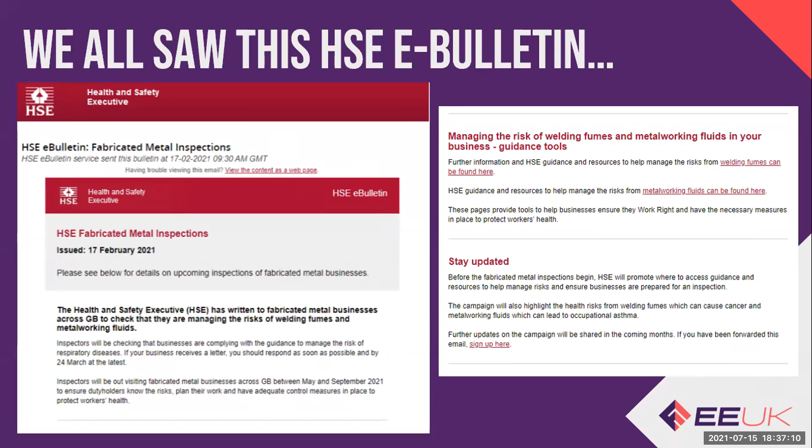Right, so diving right in, the HSE announced earlier this year that they intend to send their inspectors to fabricated metal businesses between May and September of this year. So this is now underway. These inspections are aimed to ensure duty holders know the risks, plan their work, and have adequate control measures in place to protect workers' health. When organizing this presentation, I thought, okay, welding fume and metalworking fluid, these are such big, complex topics. How am I going to break this down?

Well, I'm going to do this how I know how to do this as an occupational hygienist. Occupational hygiene is concerned with the anticipation, recognition, evaluation, and control of health hazards in the workplace. The focus of an occ hygienist is worker health protection.

Did you know, perhaps you probably do know, that for every one safety-related death at work, there are about 100 health-related deaths from work-related disease. It's really shocking, and this is why I focus on occupational health; it is so important.

So I'll be going through each topic, taking the step-by-step approach as an occupational hygienist, and I'm going to start first with metalworking fluid. So, okay, first things first, anticipation. This is the recognition of hazardous conditions. So metalworking fluid, what is it?

It is the name given to a range of oils and other liquids that are used to cool or lubricate metal workpieces when they're being machined, ground, milled. There are 4 basic classes. There's straight or neat cutting oils, which can be made up of mineral or synthetic oils, which have been refined and are not diluted by water.

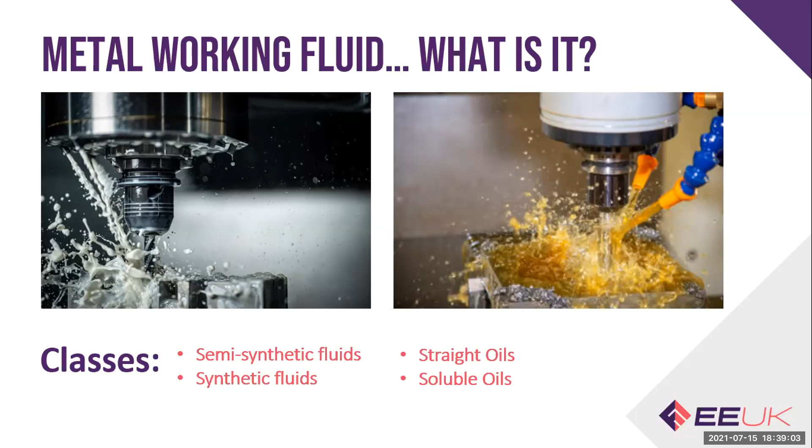There's soluble oils containing refined petroleum oils and emulsifiers. There's semi-synthetic fluids also containing refined petroleum oils to a lesser extent, as well as water and additives. And there's synthetic fluids, which do not contain petroleum oils, but use detergent-like components and other additives to help wet the workpiece. So those are your basic metalworking fluids.

When we go to site, we will see containers of metalworking fluid like this. We could be dealing with a neat mineral oil, a water coolant mixture, a petroleum-based distillate, vegetable oils. It totally depends on what exactly the process is that metalworking fluid needs to do. So what we really need is the safety data sheet, the SDS, to assess what exactly this metalworking fluid is.

But we can't just stop there. The SDS doesn't tell us everything. This fluid can have additives. It can have biocides, contamination of oil or metal fines. These things change the nature of the contaminant. And as this process is a high energy process, it creates a mist. This causes the fluid itself, as well as these contaminants within the fluid, to become airborne.

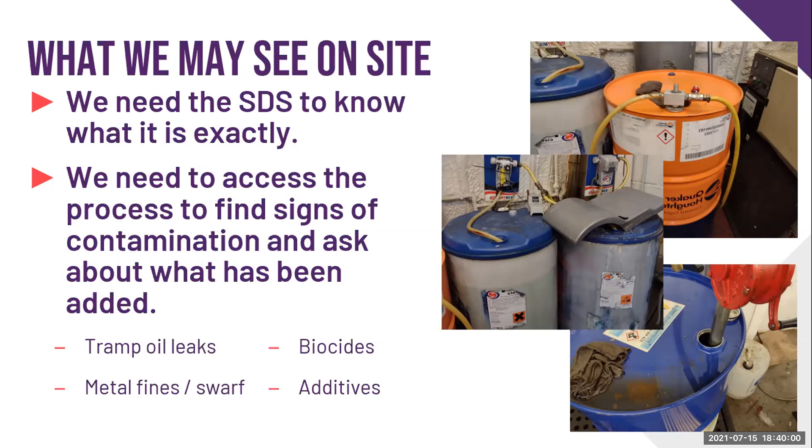Right, so we know what it is now. Next is recognition. This is the identification of hazards and their adverse effects. We've reviewed the SDS. We've looked into contaminants and additives. How hazardous is this fluid when we then generate it into a mist?

Well, the health risks associated with metalworking fluids are thought to be from a microbial origin, so the presence of bacteria and endotoxins. The focus should therefore be on the root of this exposure, which is a poorly implemented fluid management system and inadequate controls.

A poorly managed system will likely lead to increased microbial growth, and inhaling contaminated metalworking fluid mist can cause lung disease, such as hypersensitivity pneumonitis and occupational asthma. It can cause skin disease, such as dermatitis.

But the health risks can be managed should the composition of the fluids be prevented from deteriorating whilst in use. As the fluid contaminates and the conditions are in favor of microbial growth, this increases the health risk.

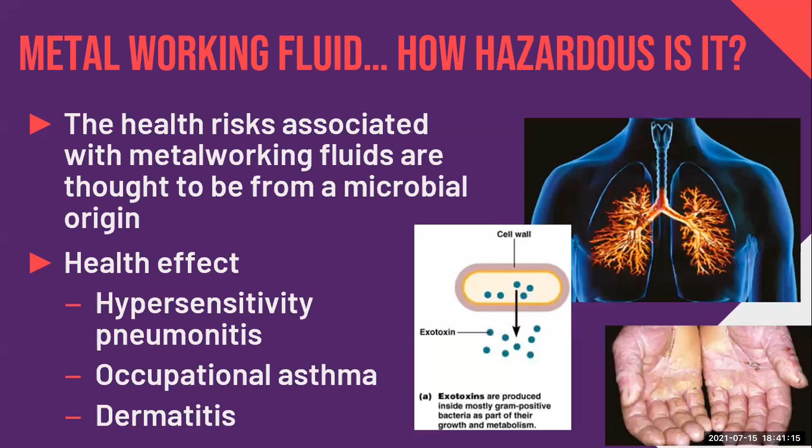Okay, next, evaluation, the measurement of exposure to hazards and the qualitative or quantitative interpretation of those hazards. This is a little bit of a pet topic of mine, so forgive me, I get a little excited here.

But before we actually go straight into personal exposure monitoring via sampling, let's first look at the ACOP of COSHH Reg 10, which is about monitoring. Ask yourself, do you need to monitor? We do if the points seen here on this slide are met. But we should also really be keeping in mind there is an HSE monitoring strategy for toxic substances outlined in a document called HSG 173. It details at what point measurements would in fact be needed.

There's quite a bit you can really do just by an initial appraisal and a basic survey using qualitative or semi-quantitative means of assessing the exposure. So it's just to say you don't necessarily need to dive straight into sampling.

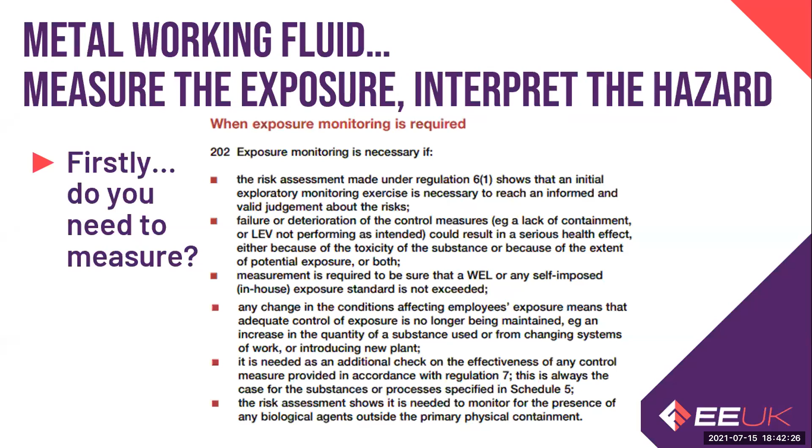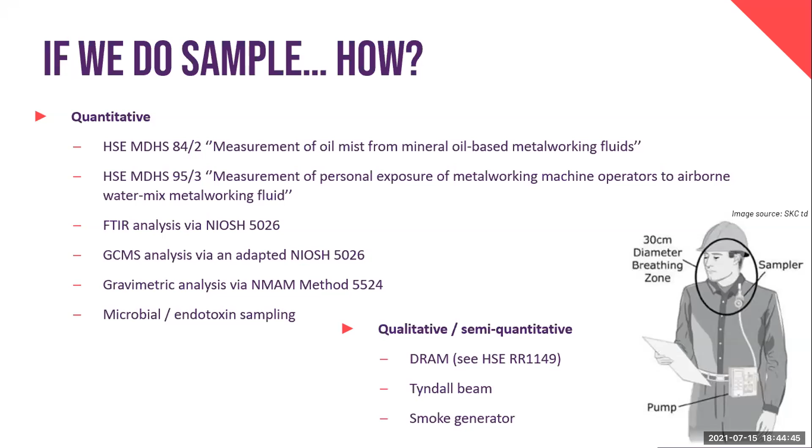But, and this is a big but, you need either boron, sodium, or potassium present within the coolant to act as the marker. Normally it's boron. Saying that though, boric acid has been recently classified as a substance of very high concern. It's a potential human reproductive toxicant. So lubricant manufacturers have sought alternatives and developed miscible metalworking fluids without or with reduced content of boric acid. Therefore, boron might not even be present or in high enough concentrations to be used as a marker for this method. And it really throws a kink in the works for that one.

So I'm talking about quantitative methods, but I just want to sidetrack for a minute because, let's say we do undertake the sampling. What do you compare that result against? It can be really difficult to judge the risk without limits available, and there is no workplace exposure limit for metalworking fluids. There's some possibilities. So there's a NIOSH REL of 0.5 for the total particulate mass. It can be applied, but with caution, as this is not a health-based limit and it may still result in ill health.

There is also a withdrawn guidance value of 1 for water-based metalworking fluids. But again, this is not a health-based limit and was previously defined as a good practice control level. Furthermore, outbreaks of lung disease have occurred under this level, and so it is not a safe limit. If we are to ever reference a revoked limit or a guidance limit, then we just need to be very, very clear that it is not being used to judge acceptability.

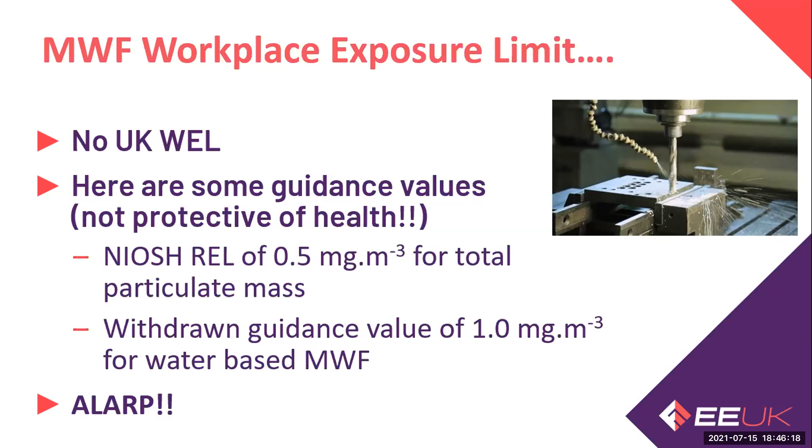And let's not forget ALARP. It's not just about the sample result being below the WEL or guidance limit. No matter the sampling result, it is vital that the principles of good practice with hazardous substances are applied. And due to the severity of the diseases that metalworking fluid may cause, and that there is no safe exposure limit, the level of control needs to be high. And this broadly equates to ALARP.

There's also a Tyndall beam, which is essentially a dust lamp. This dust lamp highlights aerosol particles not seen with the naked eye. And a smoke generator, fake smoke generator, allows visualization of airflow movement within or around the machinery. These evaluation methods can help inform decisions regarding where to focus investments to improve exposure control measures.

Right, so saying that though, I've talked about your qualitative, and I am personally quite a fan of the qualitative. There may still be cases where active personal sampling is required. For example, should further data be needed to make an informed decision regarding the likely exposure levels, like, should it not have been practicable to gather sufficient information during the fluid management audit or qualitative analysis. Sampling can be done, but I caution that these sampling methods each have notable limitations.

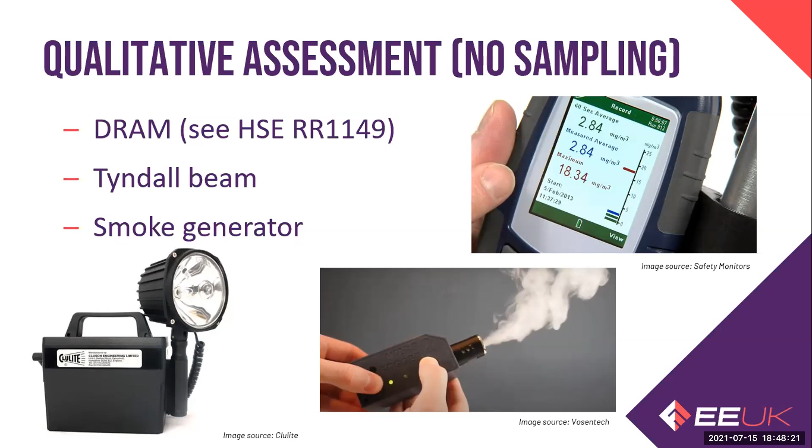So, going back, right, so now that's a lot of different ways to assess metalworking fluid exposure. We have quantitative, we have qualitative. Which one should we pick? Well, this is my personal opinion. I've already hinted at it. So the lack of health-based exposure limits to base the sampling results against is a considerable drawback to the quantitative sampling approach. The sampling methods themselves have many drawbacks.

They give you fuzzy numbers to work with. And I feel that a quantitative approach may take attention away from what is most paramount, and that is actually controlling the exposure. So the focus should be on control. Mitigate the risk by properly managing your fluid quality, control the mist generation at source, and prevent direct contact with the fluids.

I would advise that the most constructive approach to evaluating the risk to metalworking fluid exposure is auditing the fluid management system along with a qualitative analysis of the exposure controls in place. Quantitative sampling can provide the employer with some evidence about the adequacy of the control measure, but this must be complemented with observations made during the qualitative analysis anyways. And also the achievement of adequate control being decided in line with the requirement of work, not just sampling results.

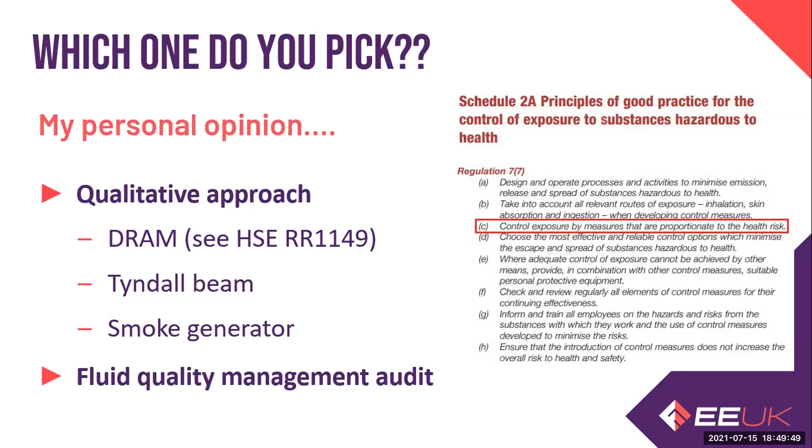Okay, so yes, a qualitative assessment backed with an audit of fluid quality management program in place. That's my vote there. I've talked about the former already. I want to talk about the latter now. Fluid quality management auditing. There's a guide from UKLA, that's the UK Lubricants Association, called Good Practice Guide for Safe Handling and Disposal of Metalworking Fluids. There's also the HSE's COSHH Essentials from the MW series. In particular, MW5 goes through managing your fluid quality. These are excellent sources of information on how to properly manage your metalworking fluids.

But say if we go in and we're actually auditing this system on site, here's a list. It's not an exhaustive list of what we would want to review during an audit. So you'd want to be asking questions like, is the concentration maintained in line with manufacturer's instructions? Are changes in appearance or odor apparent? How about the water source quality, pH levels? Are there oil leaks and contamination?

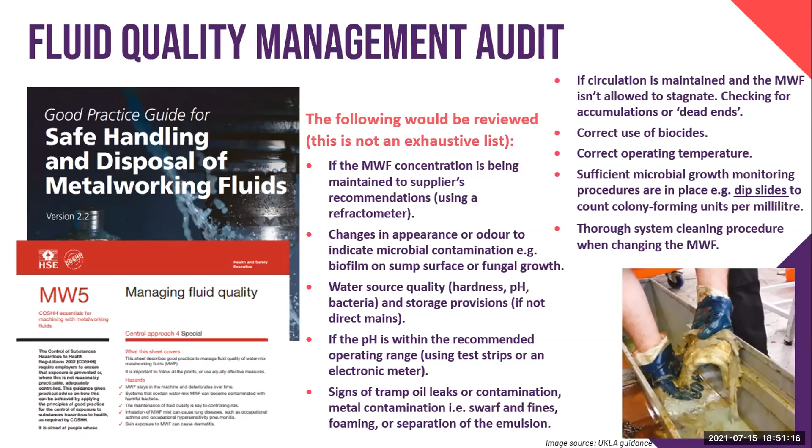Is there foaming, biofilm, stagnation? Are they using the biocides correctly? What's the temperature? What should it be? Are there signs of microbial growth? What's the cleaning procedure? So all this really needs to be looked into.

In particular, for MW1, there were a few key differences in this latest version which stood out to me against older versions. So for example, they've highlighted the hazard from the escape of mist when the CNC doors are open too soon after machining stops. And having spent years as a hygienist going into these manufacturing facilities with CNC machines, the operators do their milling cycles and they open that door right away, the second the milling stopped. And the mist is still in there, and they're basically just whooshing that mist right out into their faces by opening that door too soon.

So I was very happy to see in this update that they've highlighted that: don't open your doors too soon. Allow the extraction to take that mist away and then open the doors. So that was a very good point added in. They've also highlighted in this new update controlling the skin risks as well as the respiratory risks, enclosing machines by retrofitting roof panels, stating the method for determining the time delay on the enclosed machinery. So what I was saying about don't open the doors too soon.

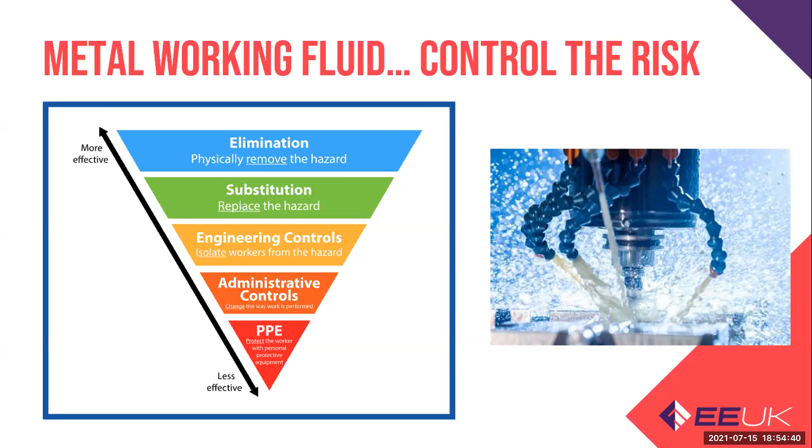Mist control measures may include enclosures, like retrofitting the roof panels, applying the fluid at the lowest possible pressure, personal decontamination and good skincare, good housekeeping, fluid management, incorporated mist filtration extraction units, so your LEV, good working procedures. So for example, avoiding the use of airlines to blow down the components and employing instead vacuum guns, absorbent materials, spindle mounted fans, or automatic compressed air hoses within the CNC enclosure, as well as programmable delays in opening the CNC enclosure too soon.

I have a bee in my bonnet about the operators opening the doors too soon and getting a face full of mist. And it's also crucial that information, instruction, training for the workers is provided in relation to the risks and controls. A review system for the effectiveness of these controls is also essential, as this will trigger prompt remedial actions when required. And a health surveillance program. This may be needed if there's a reasonable likelihood that asthma may develop due to regularly inhaling metalworking fluid mist.

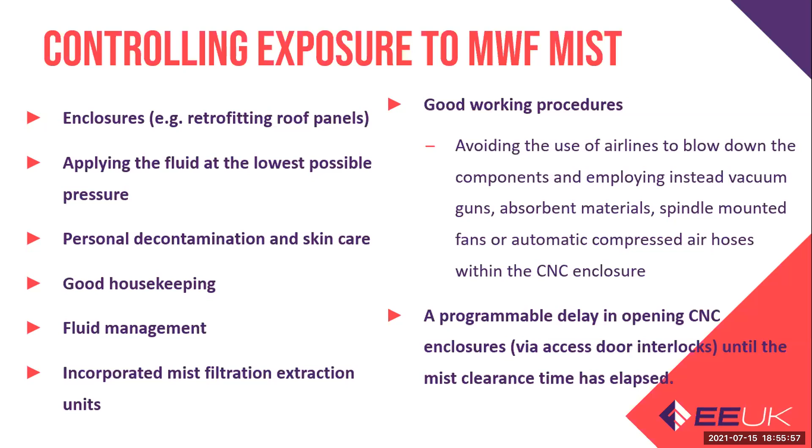We're getting towards the end of metalworking fluid. A couple more slides. So with the HSE inspections underway, inspectors will be checking that businesses are complying with the guidance to manage the risk of respiratory diseases in regards to metalworking fluid. Such guidance is available through the COSHH Essentials I was just discussing, the UKLA guidance I was also just discussing. There's also INDG 365. There's HSE's operational guidance 109. These resources provide tools to help businesses ensure they have the necessary measures in place to protect.

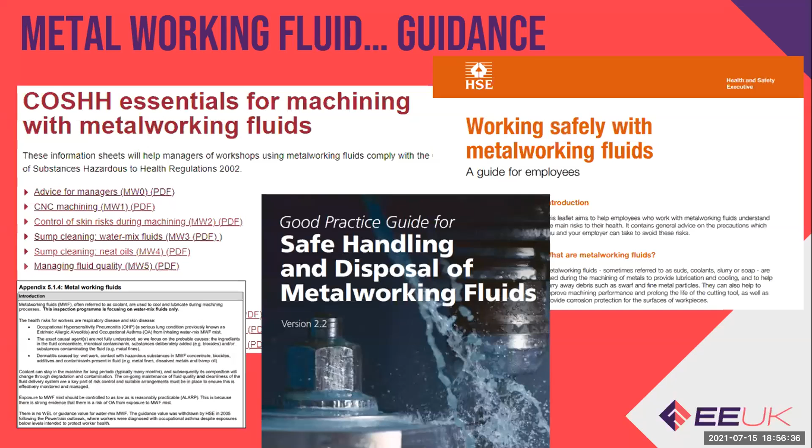Right, in summary, how could I have possibly summarized metalworking fluids so quickly? I don't know, because it's such a loaded topic. So in summary, we need to anticipate, recognize, evaluate, and control the health hazards. Know your fluids, look at the SDS, but also at the source itself. Look for signs of contamination or additives, which can affect how hazardous the metalworking fluid truly is. The latter points would not be covered in the SDS.

And because these fluids are being used continually, the composition is changing, the concentration changes, metal fines and oil may build up, microbial growth may form if the fluids are not being managed well. This changes the composition, and it means that it changes the extent of the hazard as well. So we need to look into it carefully beyond the SDS. We need to know these hazards; for metalworking fluid, they are quite severe, and they're especially severe if the fluid isn't being well managed and the bacteria builds up, contamination increases.

And we may need to evaluate it by monitoring. Well, each method has its pros and cons. Personally, I would normally not sample unless there's a specific situation where it's needed. And I would typically go with a qualitative approach backed with an audit of the fluid quality management system in place. From there, we need to control the exposure and then review your controls. Continued effectiveness of the controls is so, so important.

Let's go straight into welding fume. Okay, so yes, as if that wasn't enough of metalworking fluid, we now have welding fume to cover. And I was a little bit selfish. I focused a little bit more time on the metalworking fluid. It happens to be a pet topic of mine at the moment, but there's still time. So let's get into welding fume.

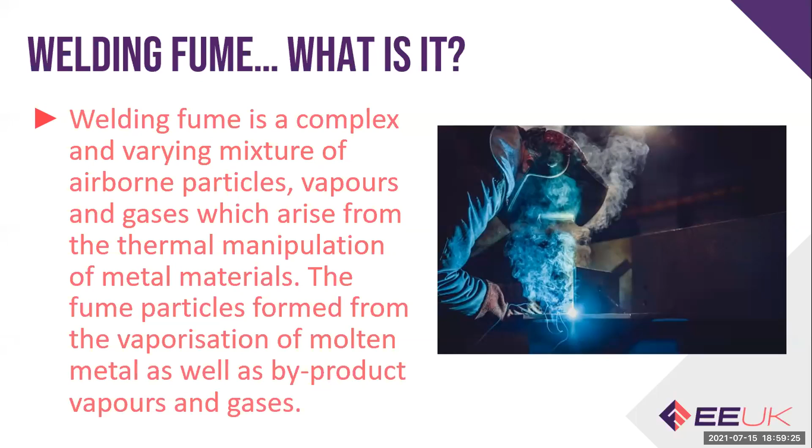Okay, so approaching this again as an occupational hygienist, let's start with anticipation. What is it? Well, welding fume is very complex. It's a mixture of particles, vapors, gases, which arise from the thermal manipulation of metal materials. The fume particles are formed from the vaporization of molten metal, and they also give off byproduct gases and vapors.

Recognition. Let's now identify the hazard and its adverse effects. Welding fume inhalation may cause a wide range of adverse health effects. Welding on plated, galvanized, or degreased metals may cause additional inhalation exposure concerns beyond just the welding fume itself.

And I'm sure we're all aware that in February 2019, the HSE published a bulletin entitled Change in Enforcement Expectations for Mild Steel Welding Fume. And they also released detailed guidance for employers in November of the same year.

IARC volume 118. So this notes that there is sufficient evidence in humans for the carcinogenicity of welding fumes. Welding fumes cause cancer of the lungs. And they've also, in this research document, stated that there's a positive association with cancer of the kidneys. So it could also be kidney cancer caused by that.

Those are the effects of inhalation, but depending on the job-specific circumstances, physical hazards should be considered as well. You could have heat stress, EMF exposure, noise exposure, and IARC 118, which I was just talking about, also notes that there's sufficient evidence in humans for the carcinogenicity of UV radiation from welding. So the UV radiation can cause ocular melanoma, eye cancer. So it's not just the fume itself, but there's lots of hazards that have to do with welding.

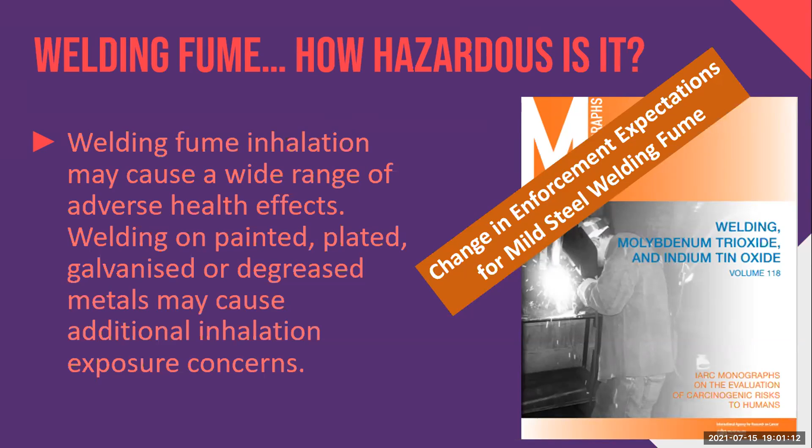Right, so welding fume inhalation has long since been understood to be hazardous to health, even before this HSE announcement classifying mild steel welding fume as a human carcinogen. Welders are going to be more prone to lung infection and reduced lung function. They may experience irritation of the throat and lungs. Welders may also experience flu-like symptoms after welding. This is called metal fume fever. It's usually linked to welding on galvanized metals, also mild steel.

Adverse health effects from exposure to manganese may include neurological effects similar to Parkinson's disease. The WEL for manganese actually just lowered because of this association. Welding stainless steel can produce hexavalent chromium, or chrome 6, which is a lung carcinogen. The stainless steel fume can also contain chromium oxide and nickel oxide, both of which can cause asthma.

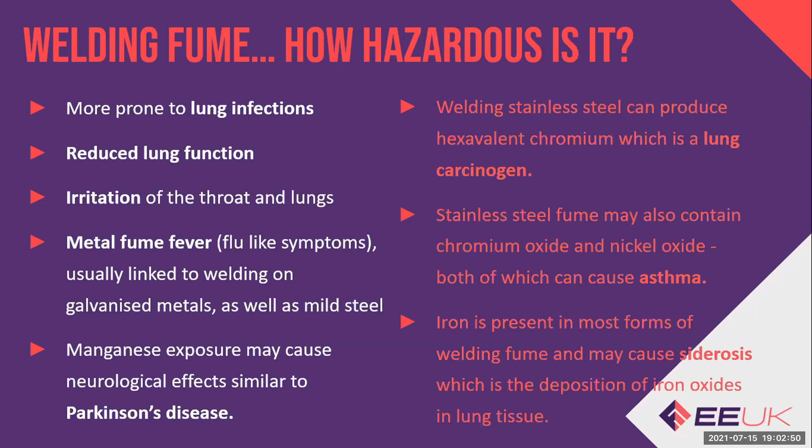Iron is present in most forms of welding fume. Welding on steel, it contains iron, of course, and this may cause siderosis, which is the deposition of iron oxides in your lung tissue. Also, the byproduct gases from welding on degreased surfaces can produce phosgene, which is a toxic gas. Shielding gases can be asphyxiant in a confined space or with very poor ventilation. Other gases like ozone and oxides of nitrogen can also be produced, and these are irritants and blood poisons. So, yeah, good grief, right? It's incredibly hazardous stuff, welding fume.

And next, evaluation. So I went through the whole HSG 173 earlier, but if deemed necessary, we can undertake personal exposure sampling. Following the HSE's MDHSs, the methods for the determination of hazardous substances, we have a few options, depending on the situation and the aim of the survey. We typically would sample with an IOM head to measure the inhalable fraction of the particulates and metal compounds within the welding fume.

We may also like to sample for the respirable fraction, because the WELs for the metals in your welding fume, such as iron, cobalt, chromium, nickel, are set for the inhalable fraction, but metals such as manganese and aluminum, which may also be in your welding fume, have WELs for the inhalable and the respirable fraction. So to cover the respirable fraction, we can use either a cyclone head, that's the second one you can see there, or an IOM with a foam insert, that's the third one.

Some hygienists, though, avoid IOM heads and cyclone heads altogether and undertake sampling via a face level sampler with a Swinnex head. This is worn on the worker's ear or can be attached to their glasses. And it's worn under the welding visor or under the full face RPE that the operator might be wearing.

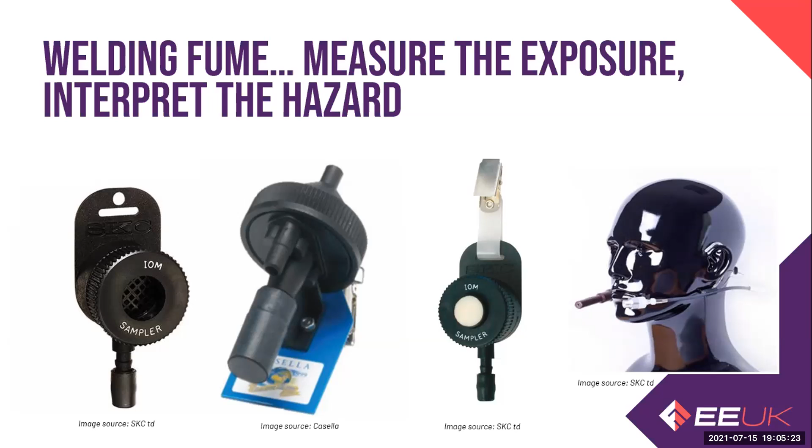So just my personal preference, but it can be a little bit debated. Right, so enough about sampling. Let's move on to what we should really be focusing on: control. As always, start with the hierarchy of control.

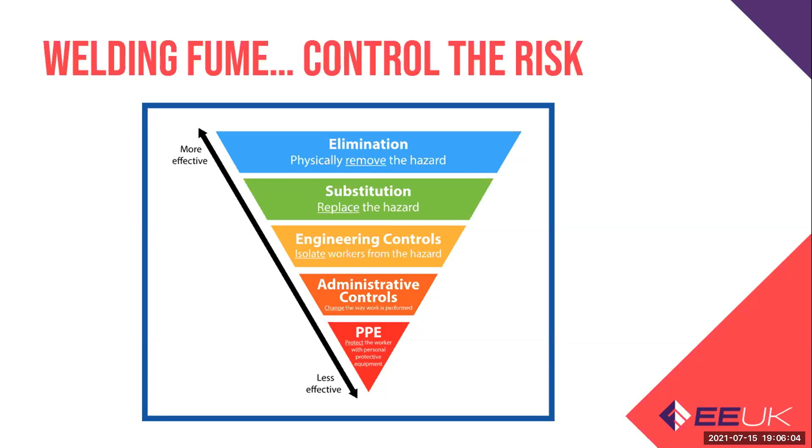Look at elimination. Do we have to weld? Can we use brackets or fasteners to join the metals together? Adhesives can be considered as well. Although, just to say about the adhesives, you want to check out the hazardous nature of the adhesive. Obviously it should be assessed. You don't want to just replace one risk for another risk, right? You want to lower the risk. And some adhesives out there are quite nasty.

Let's say that elimination isn't possible and we have to weld. Can we choose a welding method that produces least fume? Like TIG welding produces much less fume than stick, which is your MMA. Can we limit the duration of welding? Can we train the worker to not lift their visor or RPE too soon after welding if the welding fume is still rising, which was a bee in my bonnet I was talking about earlier? Can we change the worker's positioning over the fume source? Can we choose alloys and consumables with the least hazardous content?

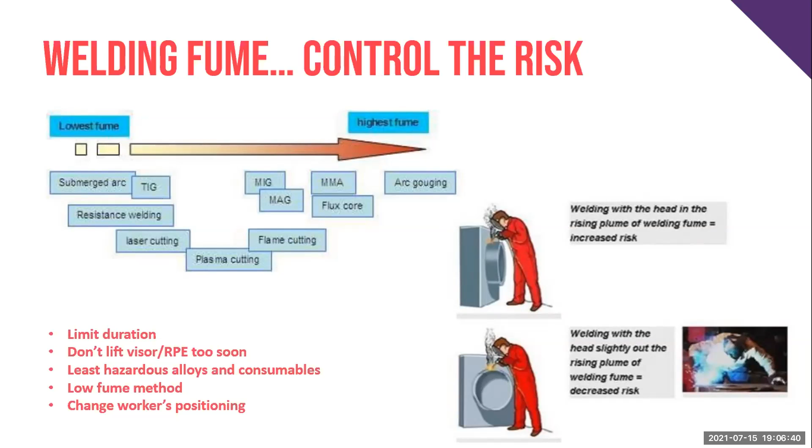Right, so go by the hierarchy, and sometimes we do end at the bottom of the hierarchy, and often you do need the RPE. So if needed, there are numerous types of RPE that welders can use, provided that the appropriate filters with the assigned APF are at least 20.

Powered respirators with an integrated welding visor are generally considered the most suitable for welding, particularly for periods of an hour or more. These do not rely on that tight-fitting, face to mask seal, and the tinted visor can be raised without lifting the clear window, allowing workers to inspect the weld without being exposed to the lingering fumes. Great, that solves my problem there. When selecting RPE, be sure to work closely with your PPE supplier to purchase the best type of RPE for your specific situation. So that choice has to be made in line with the risk assessment.

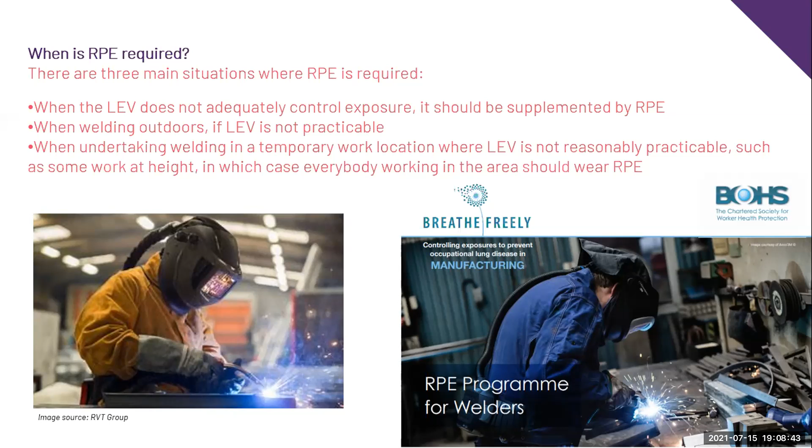And on the right here is the BOHS's Breathe Freely campaign. They have a whole website full of guidance for welders, just absolutely tons. And I've just put here a snapshot of the RPE guidance, which goes on and on about different types of RPE suitable for welders. Okay, so, as I was saying with Breathe Freely, there's just plenty of information available to help employers understand the risks and how to choose the right controls. I've listed several here, which could be your go-to. So Breathe Freely.

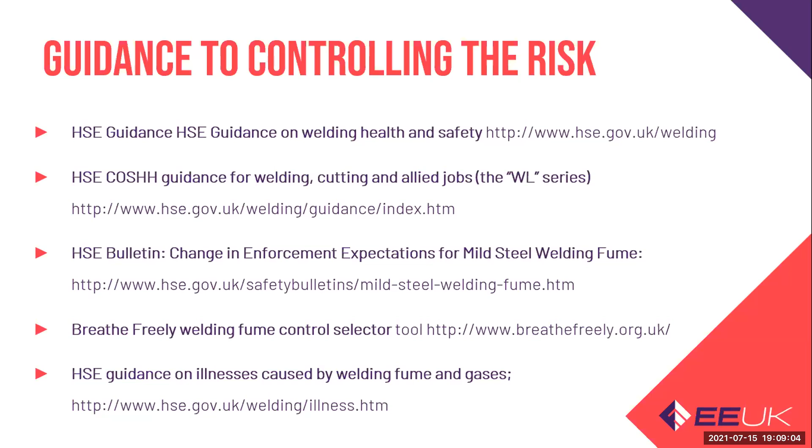And I just wanted to focus on a couple of these guidances in particular. The first being the COSHH Essentials for the WL series. So that's your Welding Fume series. WL3, I've taken a snapshot of it here. This offers guidance on good control practices laid out here in this table. So it totally depends on your scenario. You might be doing sporadic low intensity MIG welding or TIG, or you might be doing regular high intensity stick welding. And this is just a guide.

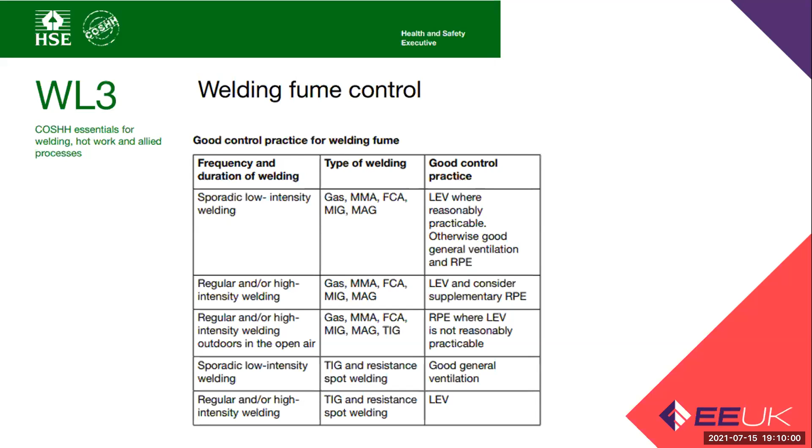Obviously, the choice of your control should be made in line with the risk assessment for that exact process for that specific circumstance. But this is just a really good guide to give you a ballpark of, okay, if you're doing high intensity stick welding outdoors, that's RPE where LEV is not reasonably practicable. So it just points you in the right direction. It's a really good guide.

And then the second thing I wanted to talk about, it stems off of this Breathe Freely website I keep going on about. They have a Breathe Freely welding fume control selector tool, and it's great. You launch the tool, click on it, you select the type of weld, the material, the duration, the size of the workpiece, and it spits you out a control option.

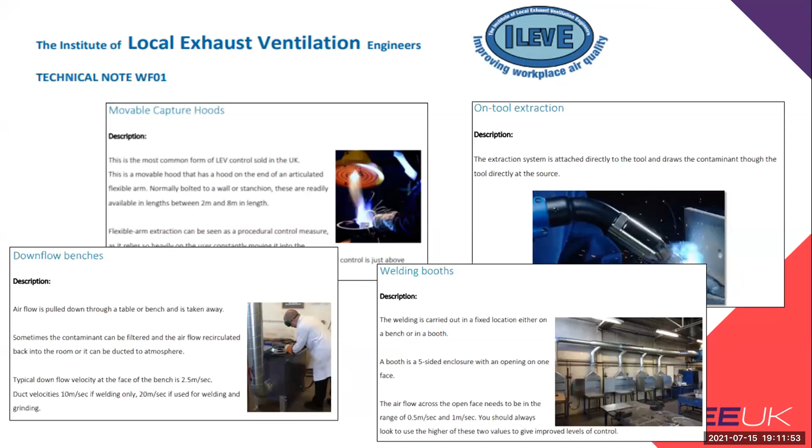So just to summarize welding fume: it's carcinogenic, along with a wide array of other potential health effects. It must be controlled to a high level. This may very likely need LEV, and RPE could also potentially be required. And it's really important to train your workers on how to use these controls and ensure that the controls are being properly maintained for continued effectiveness. And that's it. I'm done. Any questions?

Okay, Mary. If you want to stop sharing your screen. Yeah. Okay, we've got a couple of questions for you. Oh God, I'm so sorry. I'm not very techie. How do we stop? So just go to, yeah, well done. I'm sorry, I found it. Okay, so we've got a couple of questions for you.

Okay, from Nick Jones. Is welding fume a bit of a misnomer? Surely cutting would create similar hazards. So should the risk be termed hot works, or is there a major difference between welding and cutting in terms of health hazard? Do you mean like mechanical cutting or plasma cutting? I would say you're looking at cutting using oxyacetylene, I would expect. Yeah. Yes, so that would be covered as well.